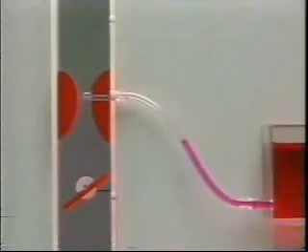Here we will use a model to demonstrate. As you can see, the throttle valve opening is very small when the vehicle is idling or traveling at low speed. The amount of air allowed in by the venturi is small, insufficient to draw much fuel.

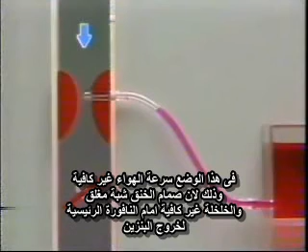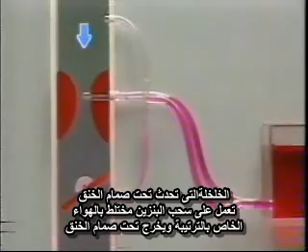Now let's place another port below the throttle valve and see what happens. Because the vacuum below the throttle valve is greater, more fuel is drawn into the barrel. This is the primary low-speed circuit.

The actual flow of the fuel is as follows. It leaves the float chamber and passes through the main jet, then through the slow jet, which controls its volume. It then goes to the primary air bleeder, where it is mixed with air, and then to the economizer jet, where the volume is further controlled.

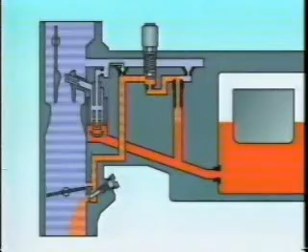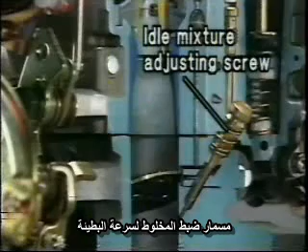Then the air from the secondary air bleeder is mixed well with the fuel and delivered from the idle port. The idle port is supplied with an idle mixture adjusting screw to allow the idle air-fuel ratio to be adjusted. The mixture can be made richer while the engine is idling.

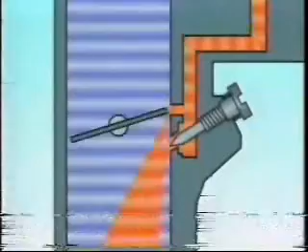When the throttle valve is opened slightly from the idle position, there will be an increase in airflow. However, the fuel supplied by the idle port alone would result in a lean mixture. To prevent this, there is another port called the slow port.

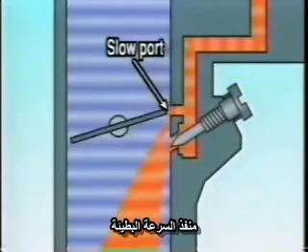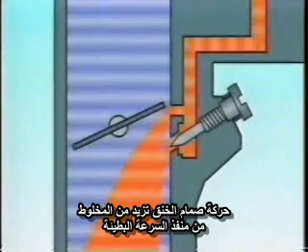The effective surface area of the slow port increases as the throttle valve opens. This prevents the mixture from becoming too lean until fuel can be delivered from the main nozzle. The fuel supply at the slow port stops when the throttle valve opens enough to draw out fuel from the main nozzle.

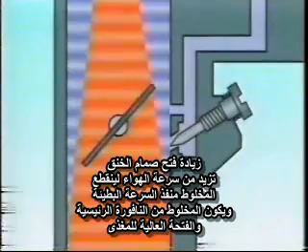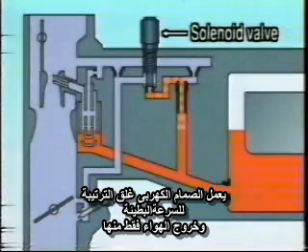In the primary low-speed circuit, there is a fuel cutoff solenoid. When the ignition switch is off, the route is closed and the fuel supply is interrupted. In some engines, a fuel cutoff solenoid also activates when the engine is running at slow speeds.